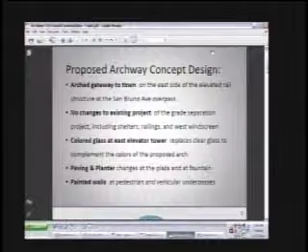Now one of the key things is it has very small, almost no changes to the existing project of the grade separation, including all the shelters, railings, windscreen, everything that's part of the new station at the grade separation. There are changes we proposed to the elevator tower, which actually is right in the view corridor as you come along San Bruno Avenue, to replace the clear glass with colored glass that complements the idea for the arch.

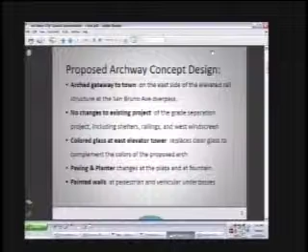There are also some changes proposed as part of the project for the plaza paving and a planter that's around the base of the stairs as you come down from the station, and also to liven up the underpass that's going to be there at San Bruno Avenue with paint, both the vehicular underpass as well as the pedestrian underpass just to the north of where San Bruno Avenue goes underneath the grade separation.

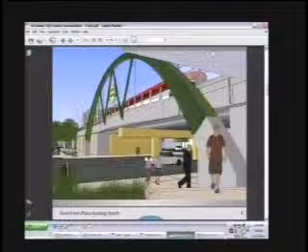And if we look at it from the plaza just to the north of San Bruno Avenue, we're looking at it roughly from where the bridge going to the stairs passes overhead, and we're looking at the arch looking up toward the train. You can see that it's pulled away a little bit from the grade separation itself by about 5 or 6 feet. And then you can see how the supports and the walls underneath are painted that yellow color. You can also briefly see the medallion up there near the train.

So we had a public study session on October 29th, and some of the things that we heard and that we modified because of that included the V or diagonal bracing that was preferred as a support for the arch to better integrate those structural elements with the arch. We also made the arch taper at the top, so it starts off thicker at the bottom and then tapers as it gets to the top of the arch, which seemed to look more graceful to us and was suggested as well.

And then when we had shown different ideas for coloration of the arch itself, we had looked at some color gradations which changed from one color to another, and really the thought was that a single color, a dark green single color, was a good idea, and so that's what we included. And a couple more. We included the medallion, which sits right in the middle of the diagonal braces.

We developed the idea of the ground supports being more substantive, as well as being high enough so that when you're on a bicycle or walking by, it doesn't impinge as the arch starts off from either side of San Bruno Avenue. So those ground supports are larger and accommodate the arch, and finally the structural and lighting concepts were developed a little farther by our structural and lighting engineers.

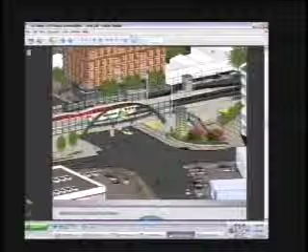So if we conceive of it in terms of what development could occur according to city plans that have been proposed, you can see looking down in an aerial view how the planter and the trees work with the elevator tower, how the arch sits relative to the station and the grade separation. Here we are again on the east side of San Bruno Avenue looking down at it, or at street level just to the south, looking from eye level up at the arch. Or if you're on the train platform, what it would look like there.

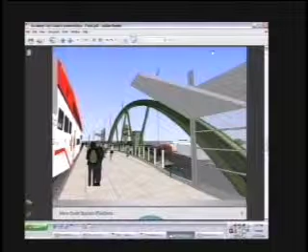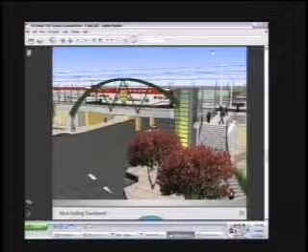Now actually it's separated, so as you look on the far right part of the screen where that shelter is, it's actually about 5 feet away from the shelter where that arch is passing by the platform. And here we are maybe looking from a window level about the same level as the platform, a little higher, looking down at the stair, the planter, the elevator on the right, and the arch. So several views just to get a feeling for what it's like.

So that's what the structure looks like, and I'm going to pass around some of the material samples. Now you have to realize these are not exactly to scale, but we have here the perforated metal, and the holes could be many different sizes, different shapes. We think round might be good, but it could be different patterns. And in order to get the dark green, what we've done here is picked a gray with a green, and then it will be frosted. So these are pieces of the sample which you can hold up to the light.

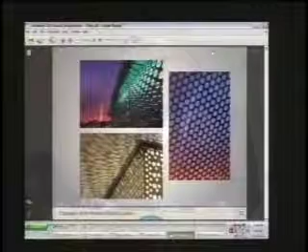So the scale of this and the color gives you a feel that actually the plastic will be about 3/8 of an inch, and then the perforated metal can be all different sizes. But the fact is that light passes through it. And so if we go to the lighting, when you look at something like this from a distance, these are just examples of what this kind of feeling could be.

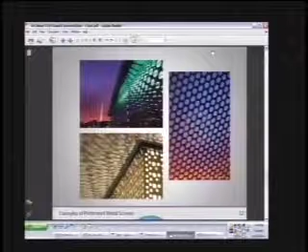We're actually talking about green, but you can see from these examples how light passes through at night, because certainly this time of year, when it's dark a good deal of the day, what this will appear as is a glow of color in an arch. And so the proposed lighting works such that there are LED lights.

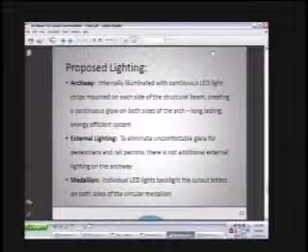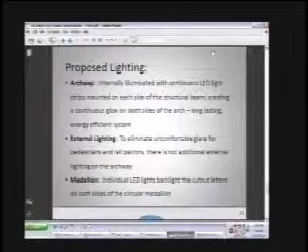The LEDs are those light-emitting diodes, which we see now in car rear lights. We see them all over the place. They're very efficient. They're very long-lasting. They can last for 50,000 hours. But they're a series of dots, essentially, of small diodes. And they're set inside along that beam, and they shine through this acrylic with the perforated metal.

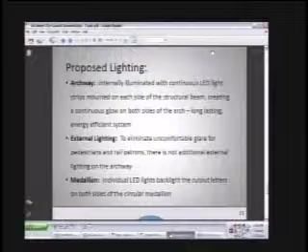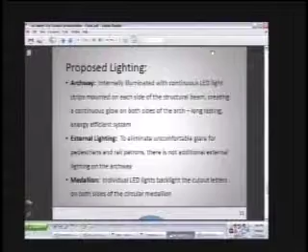And so then we wanted to make a statement also about the external lighting, because we looked at several ways with a lighting designer of whether it would be possible to illuminate it with lights pointing at it from the outside. But since it's an arch and rather thin, and since there are train passengers, drivers, pedestrians all around it, it really was advised by our lighting consultant that that would not be a good idea. It would be much better just to keep it illuminated internally.

And then also, finally, the medallion would be illuminated as well. So we have these cutout letters which say San Bruno, and the light from the inside shines through the letters as well with, again, LED lighting. So what you see is the arch and San Bruno lit whenever it was dark. And so that at least gives you a brief feel for the concept design, and we'd be glad to answer questions or proceed with Mark Simon first, whatever your pleasure. Thank you.

The susceptibility of ultraviolet on the plastic panels over a period of time. From what we've heard from the plastic manufacturers, and the particular ones you're looking at are from E-Plastics in San Diego, but there are many manufacturers, particularly with a perforated metal cover, they do not degenerate over time with ultraviolet light in any time period that we're going to probably be worried about. So we've been assured that that's not a problem.

Okay. Any other questions of Paoli? Through the chair. Irene? Would the metal be dark green as well? Is that what you're saying? Yes. I probably forgot to mention that, but the metal is painted as well, so it will not be the silver color. It'll also be painted dark green. Okay. Thank you. Anyone else? All right. Mr. Simon?

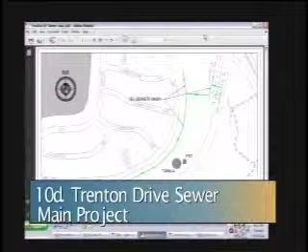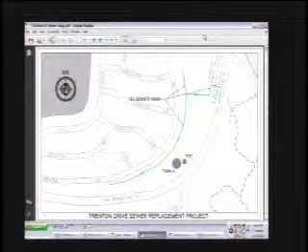As you can see on the exhibit, the existing Trenton Drive sewer main is located in an easement behind the homes on the south side of Trenton Drive, uphill from San Bruno Avenue. This sewer main was constructed in the 1950s and is in need of rehabilitation or replacement in order to reduce sanitary sewer overflows. The Trenton Sewer Project has been included as a priority project in the current draft sewer master plan. Between 2007 and 2010, the Trenton area had 8 instances of SSO, and 4 of the 8 were of the most serious Category 1 SSOs.

Explain SSO just for the public. SSO stands for Sanitary Sewer Overflows, the acronym. And this is a much higher average than the rest of the city neighborhoods. Due to the steep terrain and heavy eucalyptus growth in the area, the Trenton sewer main is inundated with root intrusion, which requires constant and extensive maintenance and repair work by city crews. Also, since 2006, city crews have conducted 11 repairs in the Trenton sewer area.

To improve the efficiency in professional services contract procurement, the city issued a combined request for proposal, or RFP, for 2 projects, the Trenton sewer replacement and the Keynes to Angus sewer project. Details regarding the Keynes to Angus project will be presented in the next agenda item. In response to the RFP, the city received a total of 8 proposals and interviewed 6 of the top consultants. The interview panel consisted of city staff that included the project engineer, the city engineer, and the sewer division manager.

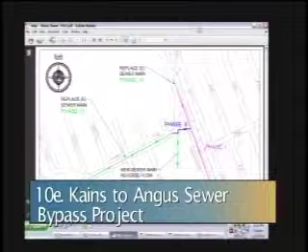And as you can see on the exhibit, the sewer main on Kains Avenue via San Mateo Avenue to Angus Avenue is a capacity deficient pipeline due to insufficient slope and size. This pipe is also in poor condition due to its age. This section of sewer main is the last remaining capacity deficient improvement project that was recommended in the 2000 sewer master plan. The project was originally included in the fiscal year 03-04 capital improvement program, but was later deferred in order to coordinate with the Caltrain grade separation project schedule.

Historically, this sewer main has experienced numerous sanitary sewer overflows, including 2 SSOs in 2011 at the intersection of Kains and Masson. In order to coordinate with the Caltrain grade separation project, the Kains sewer project has been divided into 3 separate sections.

For the first section, the grade separation constructed approximately 1,000 feet of 18-inch diameter pipe on Huntington Avenue, and also about 200 feet of 24-inch diameter pipe under the railroad track along Angus.

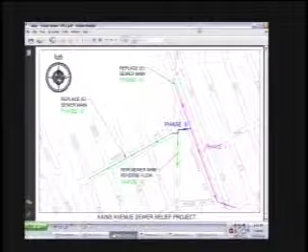In all general sewer construction, the procedure is to construct from downstream up, so that you have a larger diameter pipe downstream, and by the time you get upstream, the sewage will have somewhere to go. In this case, the 7th Avenue sewer main was increased in the year 2002 to a size of 36-inch diameter, and the Angus sewer between 7th Avenue and 1st Avenue was increased to 27-inch diameter. So with this new 18-inch and 24-inch section underneath the railroad track, it will only allow the smooth transmission of sewage going to 7th Avenue and eventually to South City. The capacity is there downstream already, there will not be a problem. All right, thank you.

Any other discussion or action? I'll introduce the resolution. Vice Mayor Ibarra, aye. Councilmember Medina, aye. Councilmember Salazar, aye. Councilmember O'Connell, aye. Mayor Ruane, aye. Item 10F, receive first quarter financial update report as of September 30th, 2012, and adopt the resolution amending the fiscal year 2012-13 operating budget to reappropriate 2011-12 carryover encumbrances.

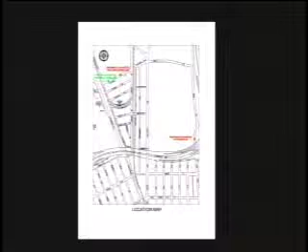As for Tanforan, the finding was that the existing meter appears to work perfectly and the reading is accurate. The recommendation was not to do anything, leave it as is. However, it was reported that there is a side stream bypassing the meter at Tanforan. If we look at it, the existing meter is the one that you see in green. So staff proposed to install another meter downstream to capture that side stream. Although it's a small amount, at least we have an accurate measure instead of estimating it.

So in the best interest of the city, staff recommends retaining Whitley Burchett to provide their professional expertise and services. They're very familiar with the situation and the problem. And most importantly, the city will hold them responsible for both the recommendation as well as the implementation of those recommendations. The expected construction completion of the project is the end of 2013. This project is an approved project in the CIP for fiscal year 12-13 with a total budget of $350,000 funded from wastewater.

The proposed contract with Whitley Burchett consists of $95,000 in total. The breakdown of that is about $48,000 in design and survey services, $18,000 in geotechnical services, for which they will be hiring a sub-consultant, and approximately $28,000 in construction support during construction. Again, we're requesting authorization for the city manager to execute a contract in the amount of $95,400.